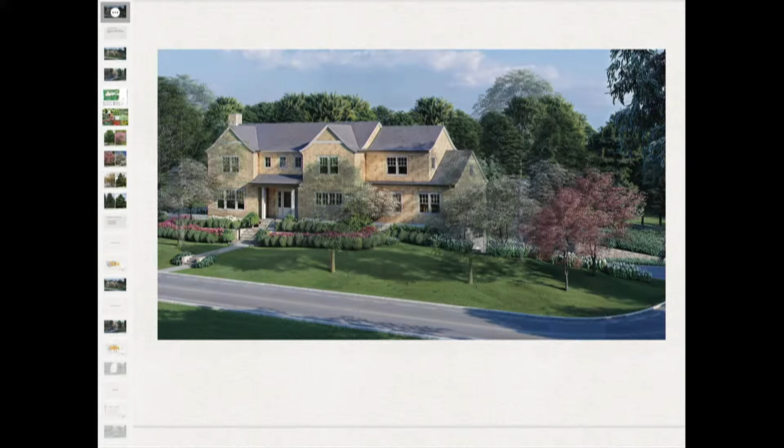The lot coverage issue has been eliminated entirely without need for permeability. Building coverage, which was 3.3% over what's permitted, has been cut in half to 1.4% over. Because the front porch was removed, the building has come forward on Hillcrest while still maintaining the same front yard setback of 37 feet. But in the side yard off Bellevue, the main portion of the building is now 5 feet further from the neighbor most closely affected. As a result, we have a better application before the board.

The variances now include a retaining wall in the front yard that's over 4 feet. That was always there, it was just noticed in the most recent planning review, and we'll have Andrew Clark available to discuss that. I'd ask that Andrew be called, then Jarrett Kest, and then we have a professional planner, should the board have any questions of a planning nature.

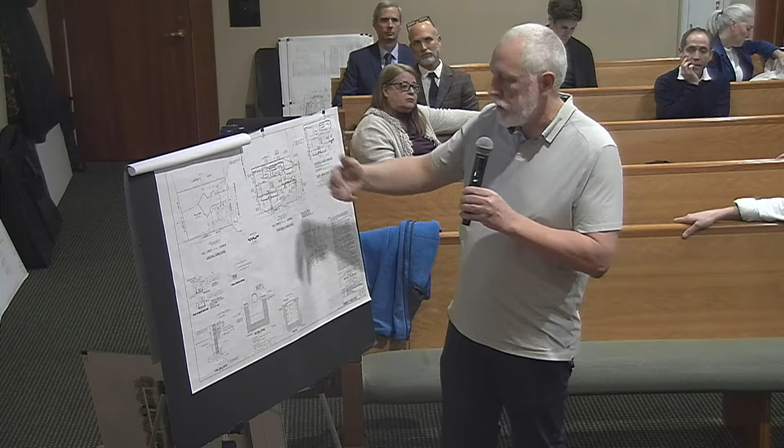One implication of this is a slightly larger impact to the steep slopes, about 100 square feet. We went from 1,250 square feet impacted on the previous plan to 1,350. That's owing primarily to the area by the left side of the driveway, where the body of the house slid 5 feet down.

Mr. Weber indicated there was a comment in the recent review from the planner about walls in the front yard area, forward on the Bellevue side of the dwelling. There are two sections. One on the left side comes about a little less than halfway out, where the wall is between 5 and 5.5 feet instead of 4 feet. There's another section in the back corner around the turnaround area, about 12 feet in either direction at the corner, where the wall's 5 feet instead of 4 feet.

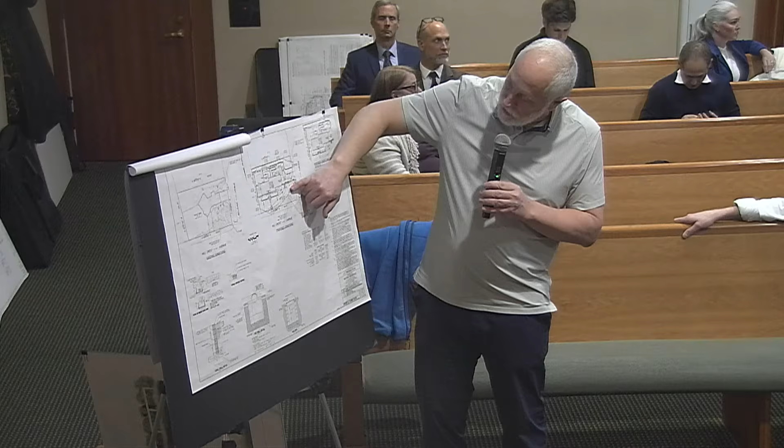I wasn't aware that was actually a variance - it seemed in the ordinance that pertained primarily to fences. But be that as it may, these sections are higher than 4 feet, and I think they're best kept that way, mainly because what we're trying to do in both areas is maintain two mature trees, one 16-inch and one 24-inch on the other side. The less you disturb the grade, the better in terms of maintaining mature trees.

Maintaining the top of the wall elevation, which is very close to the existing grade, does that, versus altering the grade, affecting grade changes which might impact the tree, or making a second layer of wall in there, which would reduce some of the landscape area and open space that's there.

So I think it's a minor difference - it wouldn't be anything discernible or notable. It's not impairing sight distance or the traveling public, which I think is the main area of concern in that part of the ordinance, making sure there's free sight for travelers. So I don't think it impacts that. I think it's a reasonable request given the conditions on site and what we're trying to accomplish with those walls.

The stormwater management remains the same. I did fail to slightly adjust the amount of area we're capturing - we're actually capturing a little bit less, but I didn't change the design, so effectively that means we have a slight over-design on the dry well. I think that's again a benefit beyond the fundamental benefit of what we were presenting in the first place, which is multiples above what our actual increase in coverage is. So I think ultimately the dry well is a substantial benefit in this case.

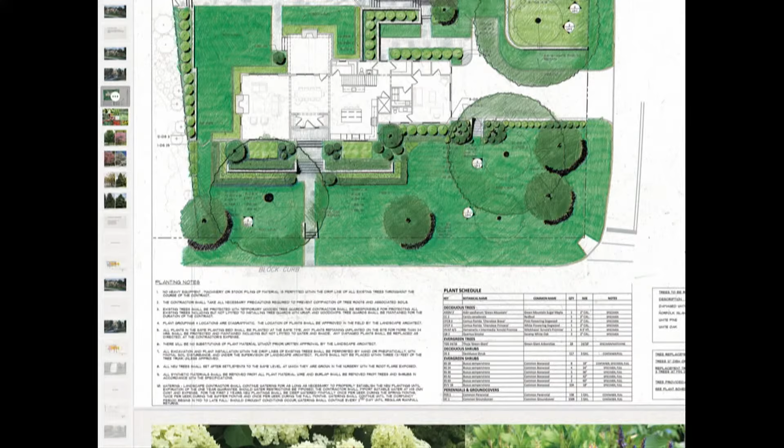So statistically, we're removing 3 trees from the project, 2 of which are pretty damaged, and 1 is a decent tree, but we're coming back with a minimum of 8 trees on the project, all of which are native. So I can touch on the palette a little bit here.

I call it 71 Hillcrest Natives, because well, that's what they are. We're committed to this being a beautiful native environment, one that attracts butterflies and hummingbirds and all the things we love: smooth hydrangea, Amsonia, Rudbeckia, Agastache, Panicum, and so on and so forth.

I think this will really complement what is on our client's house next door, because that's basically what we did there. It's full of butterflies and hummingbirds, and from a stormwater management perspective, these plants tend to absorb more water runoff than non-natives would.

Moving through the tree palette, I'm not sure how familiar you are with our projects, but we tend to plant larger trees than most. So these are representative of the size of the trees that would be planted at time of planting.

We have some sugar maples, redbuds, dogwoods of different colors and varieties, witch hazel, and swamp white oak. The picture on the right is a swamp white oak, planted on Prospect Hill about 15 years ago by us. This photo was taken about 6 years ago, so you can see this is a significant tree.

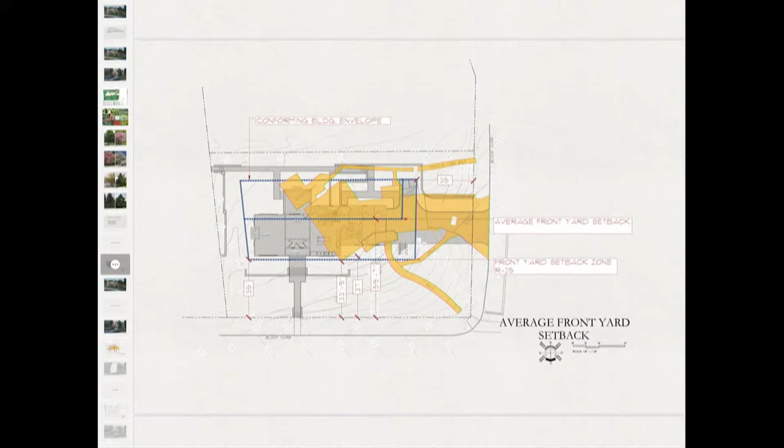This diagram describes the average front yard setback. The blue, heavy blue line—let me zoom in a little bit. The rectangle towards the top of the page is actually the building envelope per the zoning code. It's an unbuildable shape—there's no building that would ever fit in there.

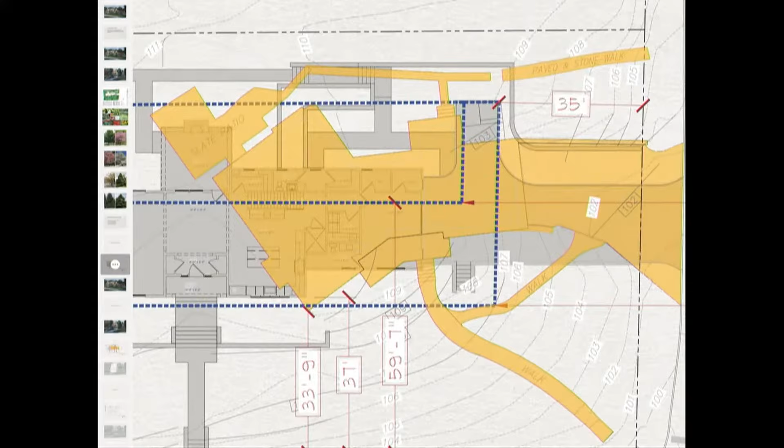That was the first challenge when Kim, Andrew, and I were siting this house and deciding where it should go. The orange represents the former home—that's the overlay, a figure ground showing the former house in orange and the proposed in gray. You can see the former home was far more non-conforming than the proposed home—it was very close to Bellevue, even closer. Sorry, my screen is not cooperating. We're about 4 feet further back from Hillcrest than the previous home was.

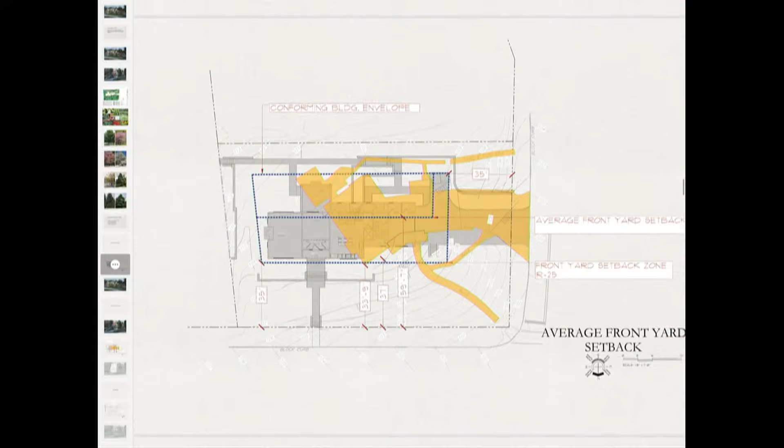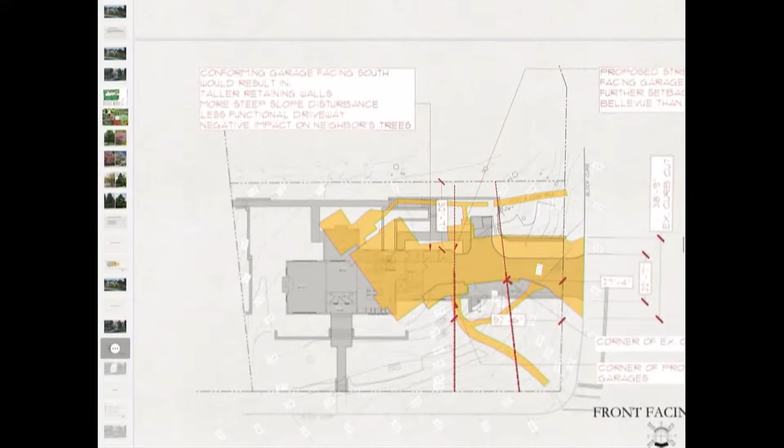So here's another figure ground, orange is the previous home, gray is the proposed, and there's a couple of red lines here. The previous garage was only 27 feet 4 inches from Bellevue. Our proposed garage is 52 feet 6 inches - that's a significant setback there.

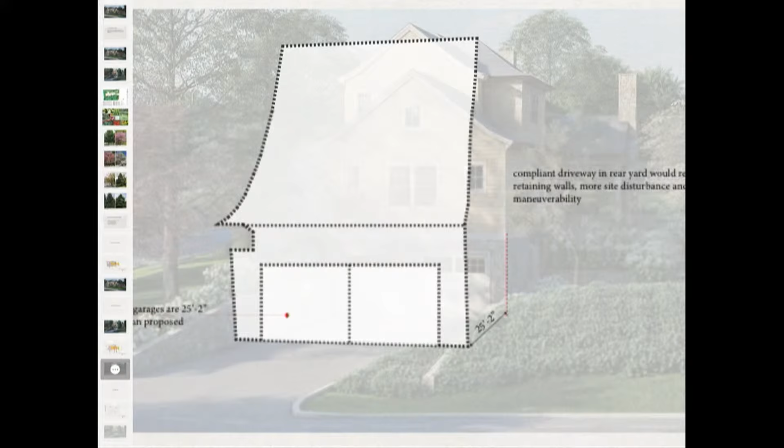So I'm going to show you a diagram here. The white screened image with the black dashed line is the outline of the previous home. This is to scale, so that's the placement of the old house. Our house is 25 feet 2 inches further to the east, set back further into the property.

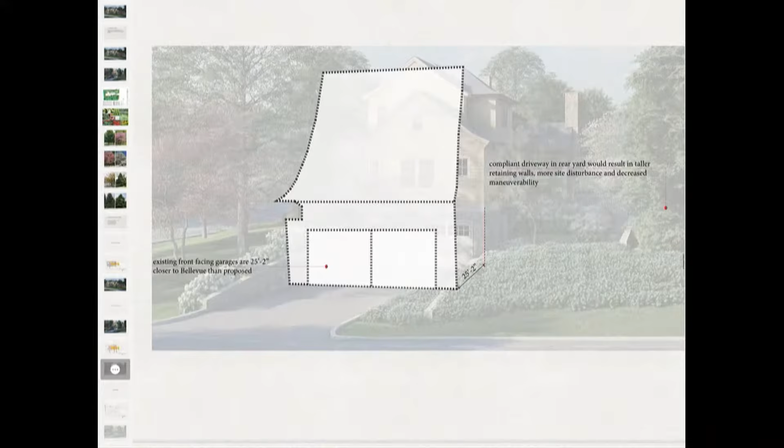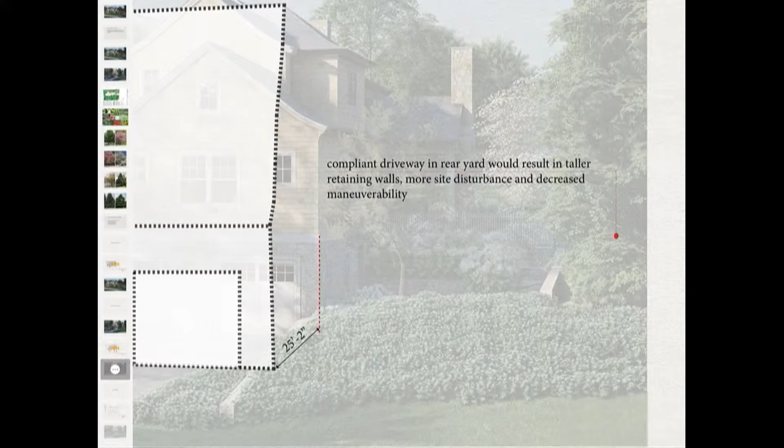Just a note here - I assure you, we've looked at every possible way to design this property to comply. Sometimes it just isn't possible. A compliant driveway in the rear, given the setback constraints in the building envelope and the undersized lot, would be so disturbing to the neighbor's property and trees that it's just not feasible.

Wall height - we touched on that, but here's a diagram, and I have some exhibits we can give to whoever would like them. This shows exactly where that wall height exceeds the 4 feet. In the case of the southern part of the wall, that's a 5-foot wall, and then we have a 5'4" section. In both cases, the intent is to preserve the trees.

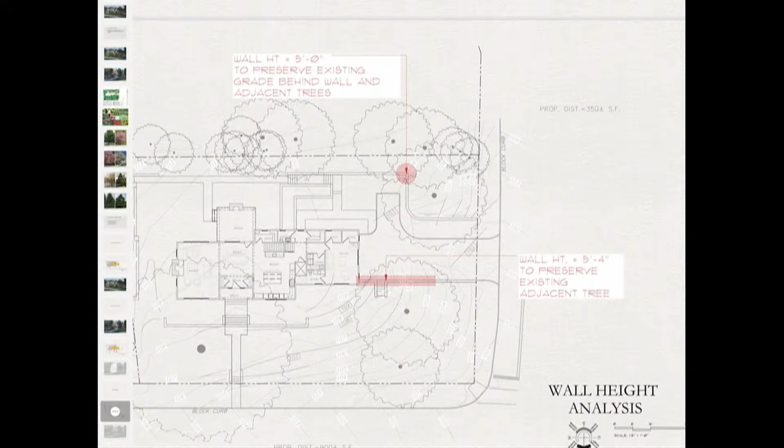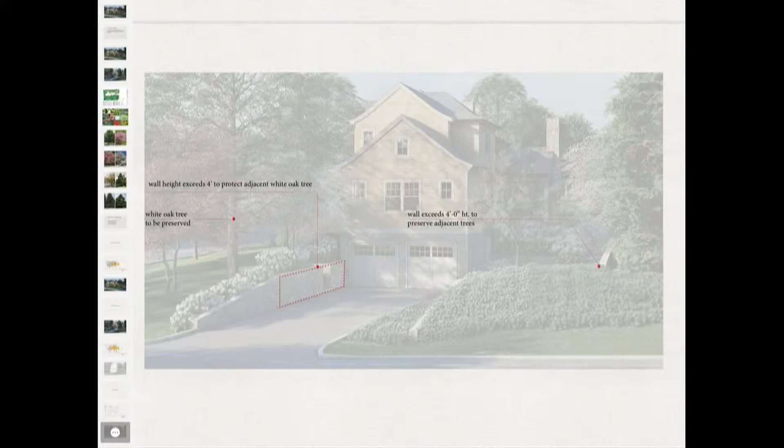Here's an overlay showing the walls that are exceeding the 4 feet. Would it help if we could zoom in a little bit more?

So that white oak tree to the left, that's a nice tree - this helps keep that tree. For example, if we made that wall lower, we would have to grade that area where there's a lot of roots down to that wall, which we obviously don't want to do. On the right side here, we have that other wall that's 5 feet tall. You can't really see it, and I think that's the point of the diagram - no one sees it but the user of this house.

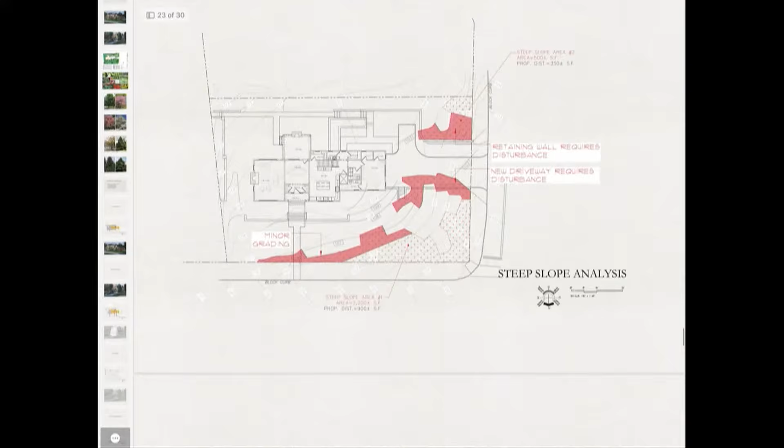Steep slope disturbance - this is pretty straightforward, I think we can move through this. Mr. Clark already addressed that, unless the board has any questions that we need further edification on. I would pass through that.

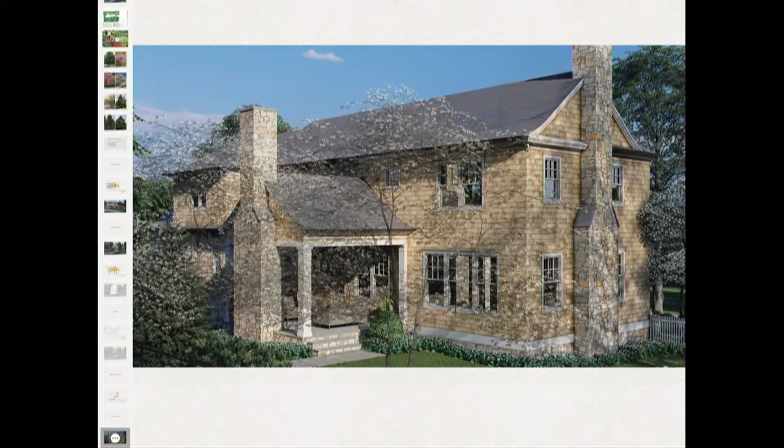Moving on, building coverage. So here is a perspective of the rear of the house showing our covered patio. Obviously we're asking for some variance relief for building coverage, but not all building coverage is created equal - this is a patio with a roof. Now, per the zoning code, it is building coverage, but it is of paramount importance, given the end user and any real future user, to have this as a shaded space.

That's what's important to our client, and I think it would be appreciated by every future client. It's not just shaded, it's also protected from rain and snow - and we know about the snow this year. And that is a fireplace that would be accessible where the chimney is. So here's a side view.

You can see there's a lot of landscaping on this project. This really would not be seen by anyone but maybe the rear neighbor a little bit, and the user of the property. In regards to the neighbors, happy to report that our clients, Tyler and Lindsay Roten, were able to meet in person or speak on the phone with everyone adjacent to this project, and they have full support of all those people.

One note, touched on in the previous hearing, but I'll reiterate it here - we will be working with the neighbor to the south of this property on the design of that landscape, because she expressed some desire to not have a big green wall of trees. She likes the ability to look through the property. So the current landscape plan is showing an arborvitae hedge. We have not had the opportunity to meet with that neighbor yet, but that would be a condition of this approval that we're happy to comply with.

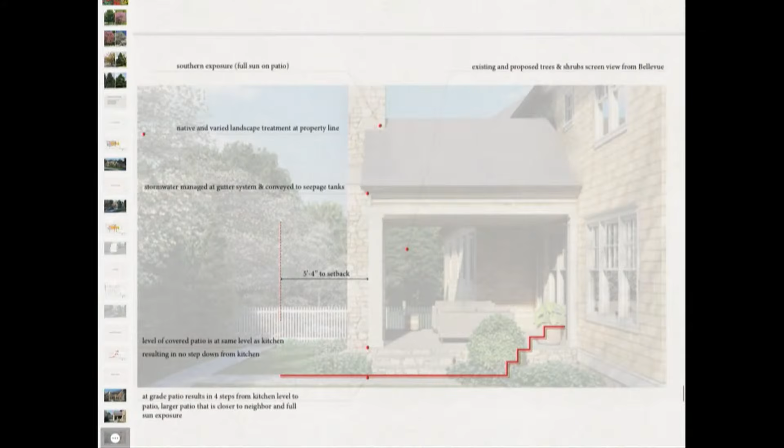So I feel like this is the most important diagram for this presentation. It's an overlay kind of stating our case for why it's important that this patio, one, be at the level of the main living space, but two, protected from the elements.

So first, this is a southern exposure, right? And having helped Lindsay and Tyler on their house, which is also a southern exposure next door - this cooks in the sun. They have the benefit of a covered porch on their house, and they really couldn't live without it.

Now, they're young and they have a young family. This house is being designed and constructed for Tyler's parents, right? So they're in their 70s, and getting older like the rest of us.

So we're trying to be conscientious of what is the most valuable space we can create for them that is, one, accessible, and two, protected. So we believe that this achieves that. Southern exposure, full sun on the patio, that's a negative. Stormwater managed at the gutter system and conveyed to the seepage tanks.

So let's just imagine this was a patio, right? The patio is hit by rain, the water runs off and goes into maybe a drain, maybe into the lawn, and maybe eventually gets to the dry well. Well, all stormwater hitting this space is going into the gutter system and being conveyed underground to the dry well - so 100% managed stormwater in this case.

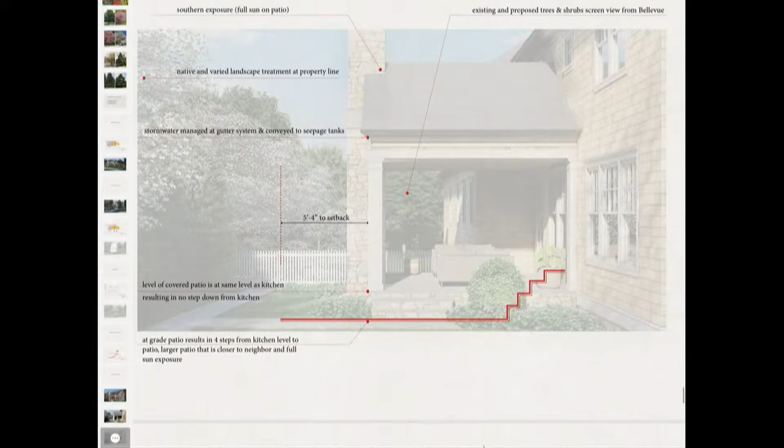Native and varied landscape treatment at the property line, touching on the collaboration with the neighbor. And then probably the single most important thing is that you can see the 4 stairs required to get to a patio - that's too many stairs in my opinion. By having it up at the elevation, which would be 6 inches down, just normal construction techniques, you would step 1 step out of the door to the patio.

But that becomes a really easy transition for everyone, but definitely someone who is older and may have challenges walking. So if this patio was simply at that level and did not have a roof, it would still be considered building coverage, because anything greater than a foot above grade is considered building coverage that's attached to the house. So it's kind of a double whammy there.

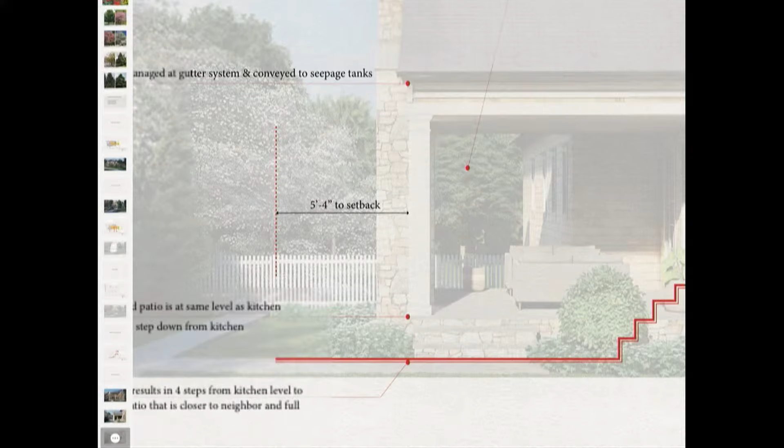And then lastly, in this diagram, you'll see that if this were a patio, it could be upwards of 5 feet 4 inches closer to the neighbor. So this is a pretty modest size space - it's about 15 by 14, more or less. I have some measurements at the end of this presentation, but this is not a big space. You can see this is to scale - these are 2 little settee sofas and a couple of potted plants, and it's full.

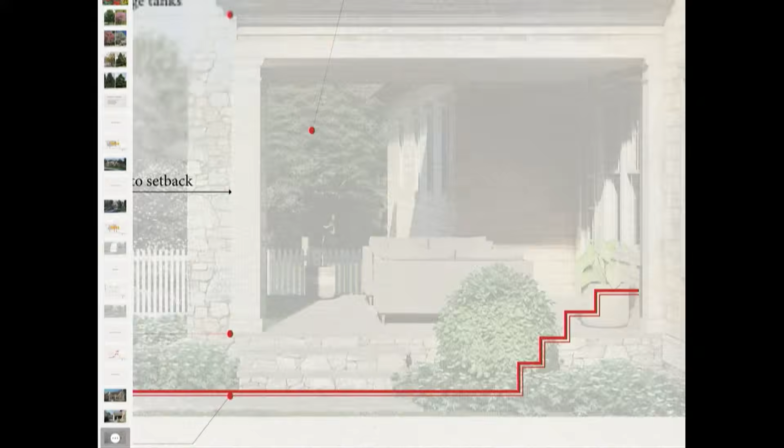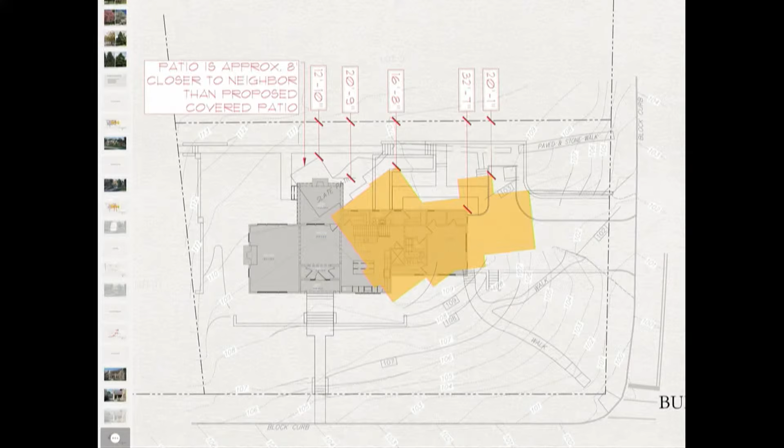And then also the previous structure, main house, was only 16 feet 8 inches away, so being another 4 feet further away. If I can stop you for a second, Jared, I actually think the proposed porch is 22 feet 4 from the rear lot, from that side lot line. That's correct - I was being conservative and I just measured to the chimney, so if you add the couple of feet of the chimney, we get to your number.

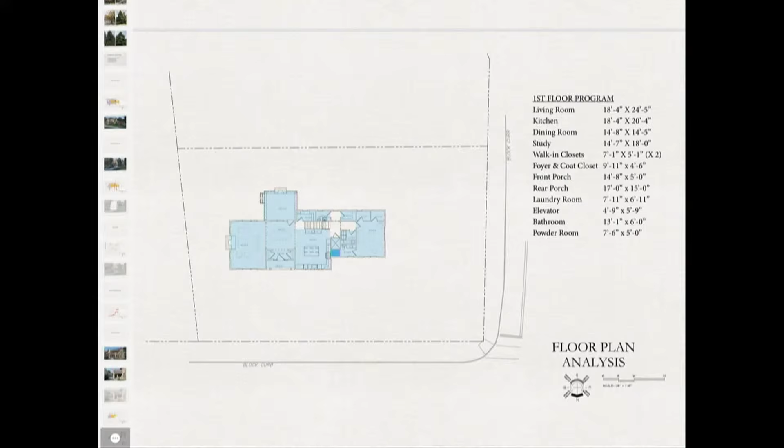And then lastly, as a design team, Andrew, Kim, and I discussed what's the good argument for having extra building coverage here. Being just the landscape architect here, my logical question, if I was sitting on this board, would be: what are you doing in this building that's making it so big that you can't comply? And I'm not an architect, but I started looking at the size of the spaces, and there's no extra spaces, and no rooms that are over the top in size.

So at the end of the day, the only concession we were able to give to the board was: let's minimize lot coverage the most we could to mitigate any of this really important building coverage for our client.

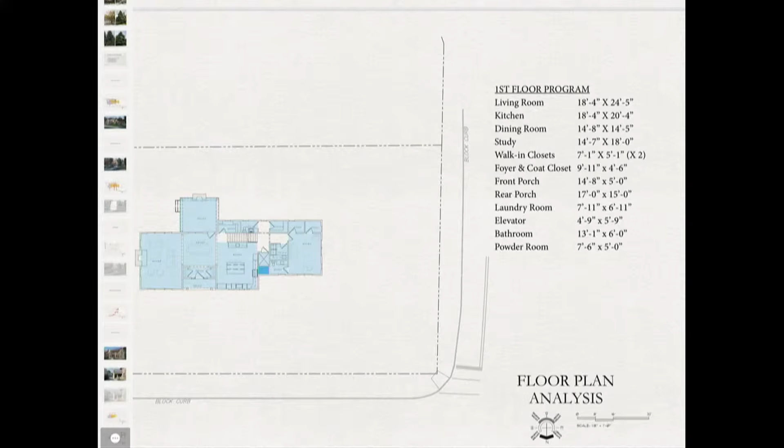So in summary, I think you'll find, and the Environmental Commission will find, that we're doing everything possible to be as environmentally sensitive as we can on this property. We'll have tree protection in place per John Linson's recommendation and requirement. We're using native plants, oversizing our stormwater system, managing all the stormwater hitting this property into the dry well system, and we're also willing to do things like permeable pavers if that helps the case. But at the end of the day, it's of paramount importance for Tyler's parents and Lindsay's in-laws to live here comfortably, so we'll need relief on these 5 variances.

Thank you. Board professionals, what questions do you have for this witness? I don't have any questions.

Just 2 questions. With regard to the retaining walls, you illustrated that I think they're dry-laid stone walls. Is that where they're going at this point, or do you know what the material is going to be? They'll be natural stone. Whether they're dry laid or not, we're not sure - they may be structural, but they will be stone. Okay, natural stone finish, and that would match the house.

We had a note in our report just noting that the size of the trees seem small at 2 inches - any reason why you use the specification of 2 inches, compared to typically more like 2.5 to 3? Well, it's the minimum, so this is what we'll call a code minimum landscape, but in actuality, when the final landscape plan is developed, almost every one of these trees will be minimum 4-inch caliper. I thought so, and we're willing to commit to that here. That's not an issue, but just from a code compliance landscape plan, that's where that's coming from. I also saw the green giants were 14 to 16 feet tall, so I was wondering why there's a difference between the two. But that would be all my questions.

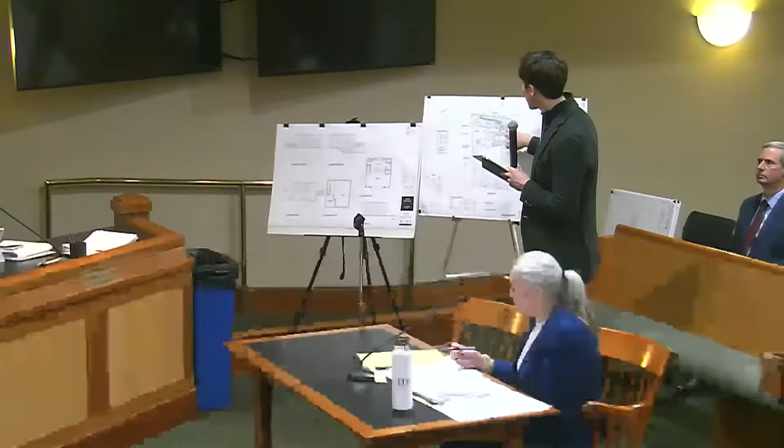Revisions to the proposal were made based upon comments by the board members at the last hearing. Can you describe from an architectural perspective what the revisions are that have been made to the plan? Yes, ultimately we reduced the height of the pool house significantly to bring it into compliance. As measured from the patio area, the roof is now only 11 feet 6 inches above the height of that patio.

Because of the existing grade which we're measuring from, the technical height of the total pool house is 15 feet, which is in compliance with the maximum requirement. But as viewed from the majority of the backyard, it would appear to be even lower than that.

The other adjustment we made is that previously we had a walkout basement, and we're no longer disturbing the ground behind the pool house. The pool house itself has been shifted 8.5 feet further from the rear property line.

So we're coming— Mr. Goldstein, I don't know that the microphone's turned on. Is there? Does that work? Oh, there you go. Apologies. Should I restate that? No.

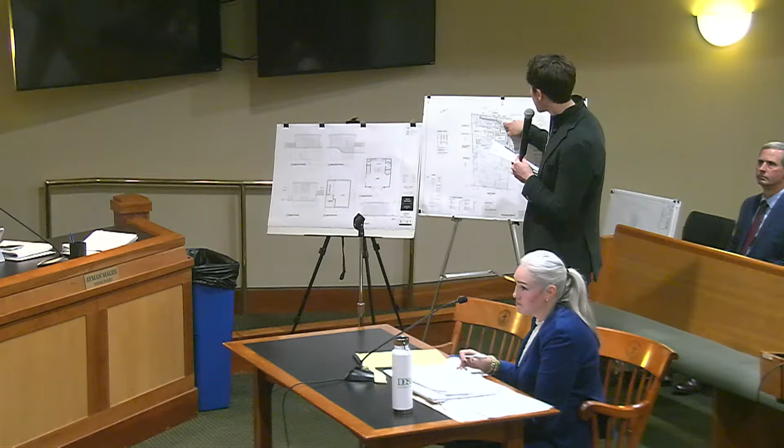So, the pool house has been brought forward from the rear property line by 8.5 feet. Now the rear of the pool house is over 32 feet from the rear property line, and as I was saying, we're no longer disturbing this area behind the pool house. As a result, we no longer have a walkout basement.

There's a small window which you can see at the back of the pool house. That's just to provide a little bit of sunlight, and frankly, to break up the facade so it doesn't feel like a continuous, uninterrupted facade. But that window is significantly smaller than would be required for egress, and there's no plan to occupy the basement. It would be used for storage and for concealing the mechanical equipment, which I think would be a benefit to the neighbors.

So again, you are confirming that the pool house will not be used as an accessory dwelling unit, and I believe that was a condition of approval at the last hearing.

Is there any lighting proposed for the pool house? Yes, we're proposing a total of 4 sconces that are decorative and not likely to give off a significant amount of light. They'd be in compliance with the ordinance.

So there are 4 of them, two on each side of the proposed pool house. Like I was saying, they wouldn't give off a dramatic amount of light. It's primarily for safety purposes, so that the staircase on the side of the pool house would have some lighting, and also to have a little bit of light by the patio.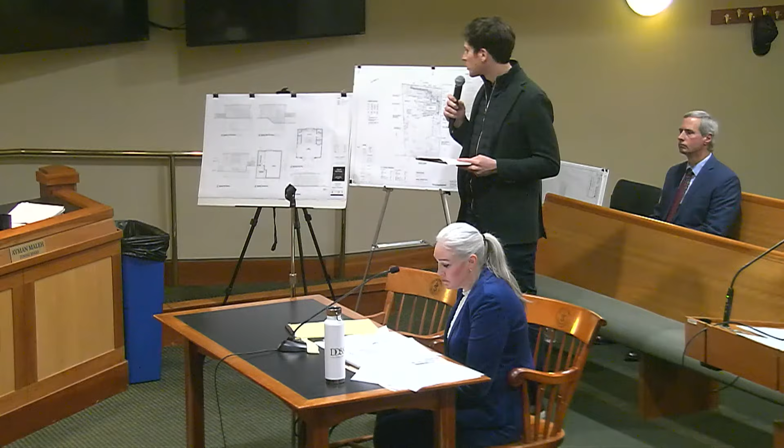Excellent. And is the pergola still being proposed, and if so, what is the height? We haven't really changed anything with regard to the pergola, but we haven't laid it out in detail. It would be in compliance with the maximum height, so it would be under the 15-foot requirement. Excellent, I don't have any other questions.

Great. Board experts, what questions do you have for this witness?

I'm just questioning something you said about the pergola, that you haven't actually removed that—that's still on the plans. It's undetermined because it hasn't been a final design. Okay, so we still have that detail that was on the previous plans, I'm just acknowledging it's there. That's fine. Somehow in my review I was thinking it had been removed, but that's not the case, right? Again, it's kind of undecided at this point.

Regardless, it would be going over impervious coverage, so it wouldn't require any additional approvals, and if it was constructed, it would be under the height that's required. Okay.

Does the relocation of the pool house change anything about the walls? Or is that something for somebody else? I think the engineer is going to testify on that. How about, can you talk about anything that is inside the pool house, like some of the pool equipment?

Yeah, the equipment that would customarily be associated with a pool—the equipment that filters and heats the pool—would be located within the basement. Typically that would be outside and would need to be screened. This will be inside, so fully screened, which is a benefit to the neighbors because they're not going to be looking at any of that equipment.

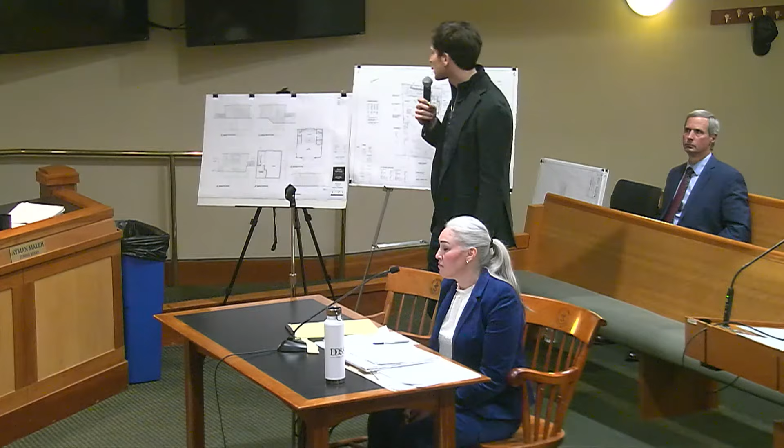We previously had a condition that the plans were going to be revised to reflect that there's no dwelling unit or beds in the accessory structure. Correct. It's not proposed to be used in that fashion, and I think the homeowner would be happy to commit to a deed restriction that notes that.

And that was a separate condition, but there's no reference to dwellings or anything of that sort in the current plans? Not at all, no. Correct. And again, by removing the walkout basement and changing those windows, which are not code compliant for egress, you couldn't put any kind of a bedroom or living area down there.

All right, thank you. Tom, was there any thought that when you moved the pool house forward to not move the proposed patio forward, so you would disturb even the less steep slope, or was that not a consideration? Yeah, that was part of it. By moving it forward, we're disturbing less steep slope. That was definitely a consideration.

But the patio, is the patio smaller than it was on the previous plan, or the same? It's shifting forward, so where the pool house was previously further back, there was patio occupying that. The layout's a little bit different, but ultimately I think we're reducing the ultimate disturbance. There's actually, I think it's 518, it could be 516 square feet reduction in impervious coverage.

The changes, and I think Ms. Oles mentioned, they're responsive to everything that the board said. Anyone else? Okay, any questions from the public for this witness?

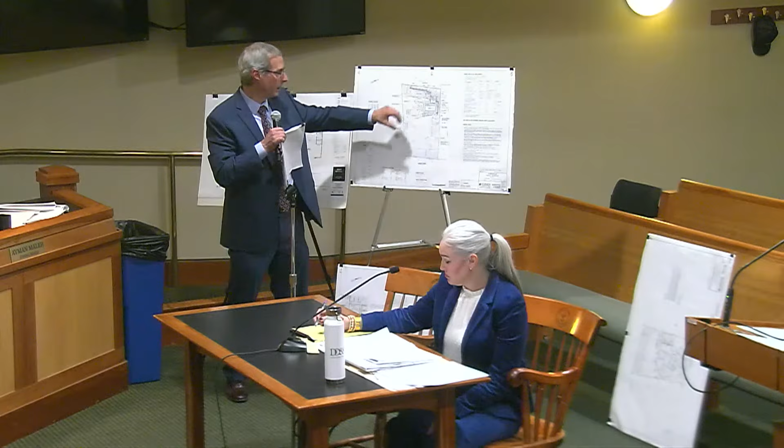And correct me if I'm wrong, but you accomplished that with some of those yard inlets, right? Those were not on the last plan? The slot drain was not there. There were a couple of inlets there, but when you consider everything all together - the pool, the pool house, both patio areas, some of the walls close to the drainage inlets, and the chimney in the back - all that goes to this drainage system.

So you have roof drains attached to the pool house that are routed to the dry well system.

Could you talk about the runoff from the pool patio and how that's directed to the dry well system? There are two patio areas. One is by the pool, with the slot drain on the west side, and drains labeled D2, D3, D4, and D5 on the east side of the pool - those pick up that side of the patio. There's also drain inlets D6 and D7 on the north side of the pool, which pick up that runoff.

There's also D1 and D10 on the south side of the pool that'll pick up that runoff, and there's D11, D12, D13, and D14, which collect runoff from the patio on the south side of the pool house. So there's quite a few. Like I said, there's 14 lawn inlets and also the slot drain.

And you addressed the pool equipment in the pool house and the drainage for that, and you testified that the pool should be less than 36,000 gallons. So I think you're good with that. Can you talk about any changes in wall heights that were on the property?

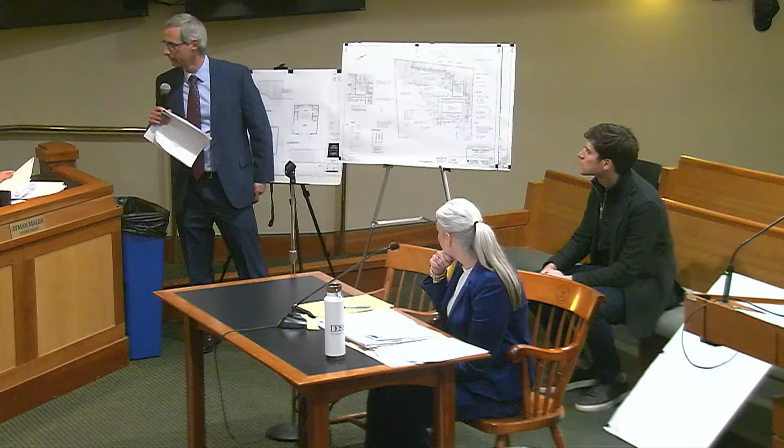Well, actually, the code is what we've done here, this analysis, and that's a worst case, because that uses existing elevations, before everything gets raised up. So I'm looking here at this drawing, let's look at elevation 105, 106. Okay, they're in back of the pool house? Yeah. So I don't think this is the best location for the proposed pool house.

Why? It is impacting our need for disturbance. I mean, if not for the pool house, we wouldn't have needed to do all this disturbance. Well, your ordinance defines height based on existing elevations, so we can't change what's back there. That's low, that's low, exactly where I was trying to go.

I'm trying to say, if we did not put this house at this location, let's say here where these driveways are, we don't need to disturb this area.

Right, but then we're redesigning. And again, the steep slope ordinance does not say that you cannot build in the steep slopes. It just regulates how you build, and makes sure you comply with certain criteria in the steep slopes, which is what they're doing.

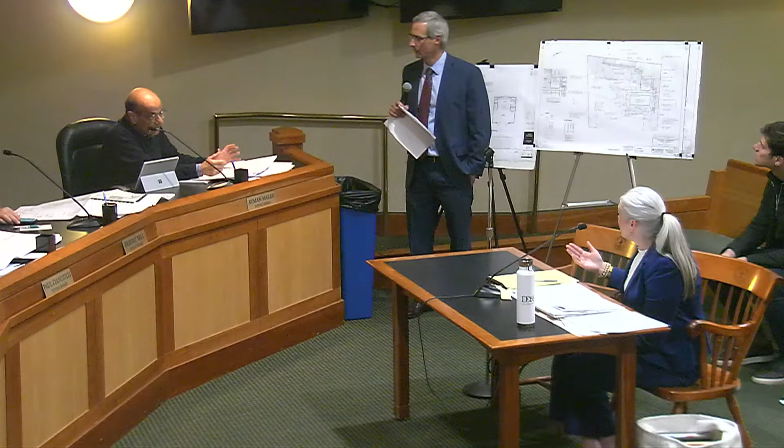If the house was built at 35 feet from the front yard, this proposal would be fully compliant. But the applicants have a hardship because the house was built too far back, and on top of that, they have steep slopes to work with. Yes, you could design any project to have no variances and make it conforming, but that doesn't make it the best plan. This is the best plan because it's located farthest away from any of the neighbors. There's going to be significant landscaping proposed, which you're going to hear about, and it complies with the intent and purpose of the steep slope ordinance.

That's exactly my point. The steep slope ordinance is to limit the steep slope disturbance by 1,000, not by 4,000. But what it says is that if you're under 1,000, you can do it as of right. If you're over 1,000, as long as you meet the intent and purpose of the ordinance, disturbance is permitted, but you have to come before the board to make sure you're meeting all that criteria. That requires a variance.

A variance is a deviation from the code. For a C1 variance, you have to prove a hardship. And in this case, they have two hardships.

And what is the benefit then? So if you, let's just keep in mind, right, if you kind of keep moving on, we can.

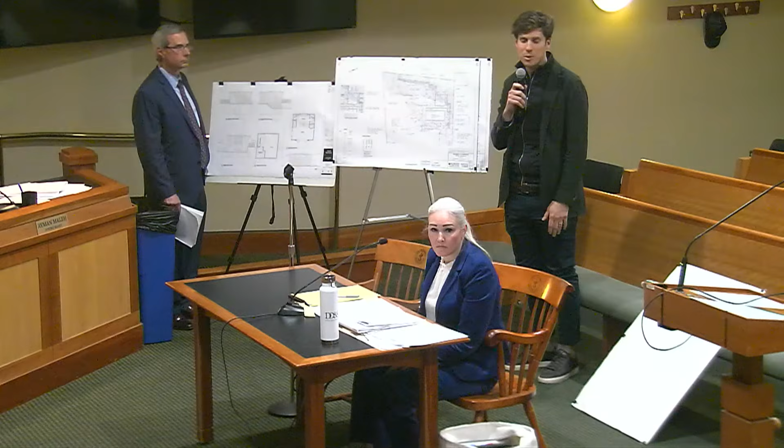So just for clarity, right now you're designing within the 15-foot technical ordinance? Correct. Okay, and what would the run be for you to meet that 18-foot requirement, that extra 3 feet? I'd have to draw it out, I'm not exactly sure. Ballpark, would it be much more in line with a proper roof pitch? Yes.

Mr. Bell? Actually, I'm just thinking about it, I just did the math in my head. It would be like a 3/12 pitch, so it won't be super steep. But it wouldn't be a flat roof? It wouldn't be a flat roof. Yeah.

I know we'll be hearing from the landscape architect momentarily, but since you talked about the change from even the drawing we've been looking at regarding the trees to be removed - not 8 but 6, partly because 2 have already been removed - you mentioned, if I understand correctly, that the 2 that were removed: one was near the dry wells, that would be the 18-inch hemlock, and the other is by the stair, closer to the house?

I think let's have the landscape architect testify and confirm that everything is correct. From a civil engineering point of view, on the dry wells, was the 18-inch hemlock removed to create more lawn space, or because of interference where the dry wells are being located? I'm going to leave that up to the landscape architect. I believe that was removed before the Chiswicks moved in, but I'll let them confirm it.

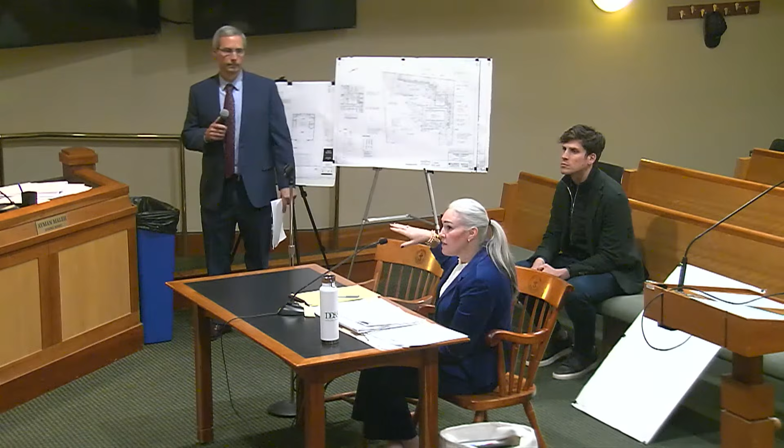But there's a house right behind it. Can you point to where the yellow house is behind? Yes, and it would even be closer to the property line. Would it meet the rear yard setback as well, likely? I mean, it would, but it would be a closer visual impact to that house than if it's tucked over in the corner. But it would still meet this rear yard setback. Yes, I think it would impact the neighbors greater than what this would.

But theoretically, you could build a house all the way back to the setback and still have the same impact. Right, but that's going to obviously impact your neighbors greater than lawn space.

Just a quick question about the water drainage from the south side to the north side. You're regrading where this new cinder block, the retaining wall, is going to be, correct? There's no drainage catch at all? I mean, any water catch there at all? For the lawn, there will be some interception of sheet flow.

No, go back further, back to the shaded area. Is that being leveled off inside that? Yeah, it is. That's the purpose of that wall. So there's... not on the left side though, right? Right, so that's the area I'm talking about. Yeah, there's no drainage proposals in this area at all.

Where does that water run off to? It all runs from south to north. That's not being changed. They're not touching the slope in that area.

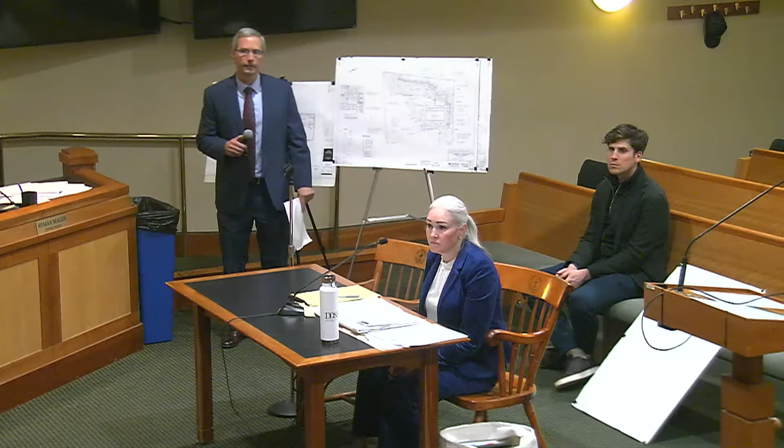Okay, any other questions? No? Any questions from the public? Seeing none? The landscape architect? Great.

Thank you. So Andy, I think this will be A2. One more color, I believe that's correct. Thank you.

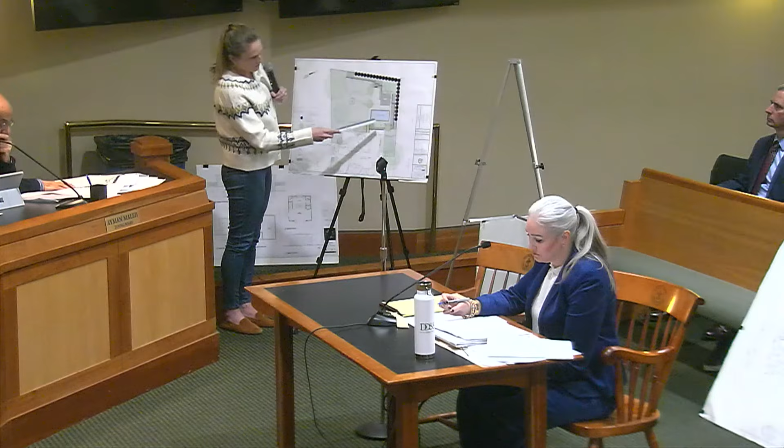And then by the pool, there are 2 oaks that don't look great. There's a lot of dieback. We just haven't done any tree work, removal, or cleanup to them yet, knowing the project was on the horizon. And 1 other hemlock that has woolly adelgid, the same disease that affects every hemlock.

So technically then you're only removing 6 trees. Correct. This plan shows you're providing 25. It could be more, but that is an additional 19 trees over what is existing. Yes, and that doesn't include all of the other landscaping that hasn't been finalized yet, just screening.

Can you just explain to the board the screening and what effect it could have on stormwater and stabilization of slopes and things like that? Of course. So any tree, lawn, shrub, anything will absorb rainwater and will stabilize the slope with their root systems. So in this plan, we actually shifted the walls so that we didn't have the 10-foot to 12-foot wall that we had on the original plan, to remove that variance.

So in doing that, we shifted the slope around and made 1 single wall. So the trees will actually block that wall at planting faster than what we would have had on the original plan, which was a 10-foot minimum wall to hold back that grade. So you'll actually get more screening faster. The AC unit, the back of the house, the retaining walls from any of the other adjacent properties -- because they're actually level, they're more at that existing grade the way we taper into their properties.

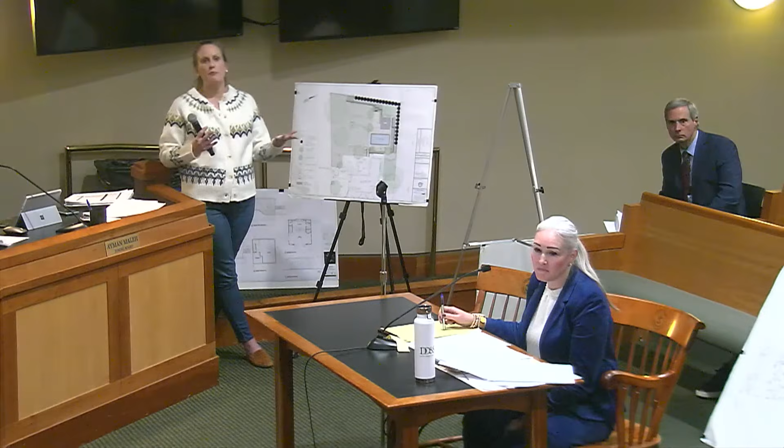I'm making sure everybody looks at this for a reason, because this is what you asked for. At the end of the day, it's actually going to be less than increasing our 500 disturbance, because even if we ran it straight, you'd still see the dotted line behind it, that's still the overlap to backfill the wall and the construction access, so there's still track marks and that sort of thing to compact.

Does conformance make it a worse outcome in your opinion? Same thing with the roof. I'm looking at it as, should we be considering something else? Not to belabor it, but yes, the law of unintended consequences - trying to fix one thing, we create another issue. That's why Zach had agreed that if there was a way to write in the extra 3 feet for the roof, we would all agree to that, it would be more similar to the house roofline, to have a little bit more consistency.

Mr. Bell? I have two thoughts which I'll phrase as questions, one very positive and one maybe a suggestion as a question. The positive one is that the pool house is in the proper position because of where the sun is, and that hasn't been mentioned yet.

That was sunlight, daylight, and south-facing patios and lawns - absolutely a factor? That's actually the first thing we laid out. No one has said that, so thank you for doing it. I apologize that I missed that. No, no, it wasn't a criticism, it's actually pretty obvious. Yeah, no, absolutely, and that's why we would assume this would be where the lounge chairs would be, laying in the south-facing, southwest.

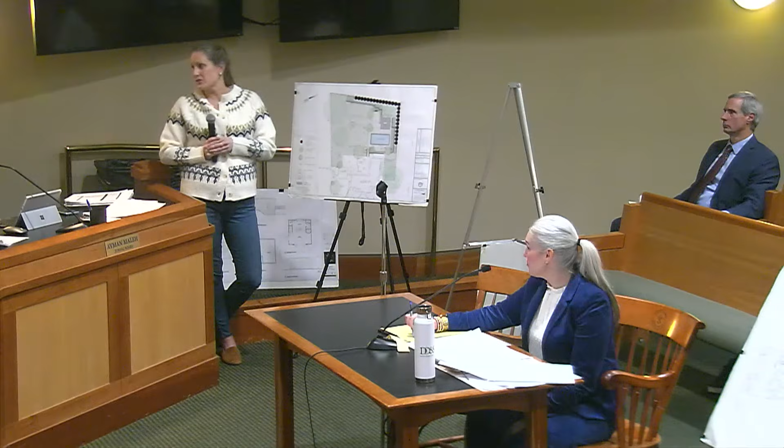We actually had it prepared and then realized we didn't have any negative comments from all the neighbors, so if they had an issue, I'm sure they would have been here. The issue of context comes up often in urban situations - seldom addressed adequately until someone complains.

The first thing the client says is, show me what's here right now, show existing. Because when you look at Google Maps, it doesn't look like that house is close at all - the garage hides the house. So moving the pool house, not that I'm suggesting to do it, to the south, which doesn't make sense from a sunlight point of view, would have absolutely no visual impact on the adjacent property. None, except for the back of the garage.

Correct. Thank you. Thank you for your question. Rhetorical. Sorry. Any other questions?

I have one. On your plan last time, dated September 11th, you had the layout for the patio, the seating area, the outdoor kitchen, the dining table - is that the same? No, that's why we removed it. It's all up for grabs at this point. We were showing that as graphics, not as furniture that was definitively shown.

Well, and again, the patio was reduced, right? So what is it going to fit now? We don't have any idea - we haven't picked furniture, layout, quantity, seating, nothing. So we kind of put the cart before the horse with that when people were asking about seats, tables, kitchens. It's more informational - those are the types of decisions made once it was more schematic, just to show what construction could have done.

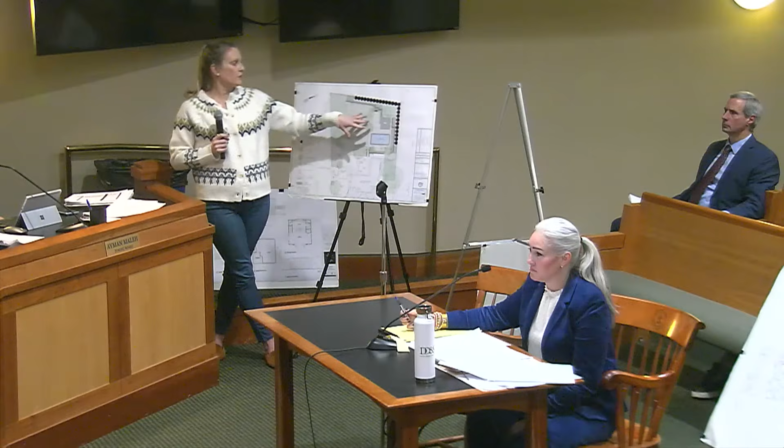Somebody like me, I see how big the patio is visually when I see a seating area, outdoor kitchen, and a dining table. Is that same thing going to fit on this other patio? It's still going to have something similar, an outdoor kitchen, but less. The patio is definitely less, over 500 square feet less. But you're still going to want to put 3 sofas, love seats, that sort of thing around the fireplace, some kind of seating area. And an outdoor kitchen? That we have no idea about. That might be off the table at this point. We're not sure.

Thank you. Any questions from the public for this witness? Seeing none, Ms. Ellis, do you want to summarize?

Before we do that, I just had a question about conditions, Mr. Mull. Are we retaining stormwater management jurisdiction for 2 years or some period beyond this application, given the amount of steep slope disturbance here? We do. Sounds like that's a request. Any objection? No objection.

Okay, Hillary, go ahead. So the applicant, in direct response to the board's comments, revised the plans to eliminate 2 of the 3 previously requested variances. As revised, the only variance requested tonight is for steep slope disturbance, which was reduced by 900 square feet. This application is a textbook C1 variance.

The lawfully existing residence is 83.4 feet from the front property line, where only 35 feet is required. The excessive front yard setback is 48.4 feet beyond what the ordinance requires and directly constrains the applicant's ability to make improvements that would otherwise be permitted under zoning regulations. If not for this unusually deep front yard condition, the proposed improvements would be located outside of the steep slope area and no variance relief would be necessary.